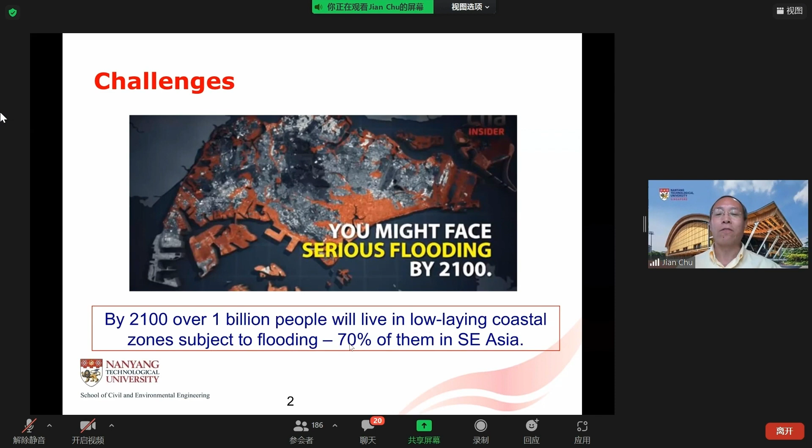Well, we know for climate change, we are facing a lot of challenges. Number one is the sea level rise, which will inundate some of our coastal areas. So for example, for Singapore, we were told that by 2100, 1/3 of our land will be inundated. And in fact, over 1 billion people will live in low-lying coastal zones subject to flooding. Unfortunately, 70% are in Southeast Asia.

In addition to inundation, we do have more frequent flooding. The picture showing on the left is the flooding in Singapore only last year. And the picture on the right is flooding in Qingdao. Qingdao has been regarded as never flooded, but started to flood recently. And the reason for that is because global warming has caused extreme weathers. Extreme flooding, extreme drought, they are just some of them.

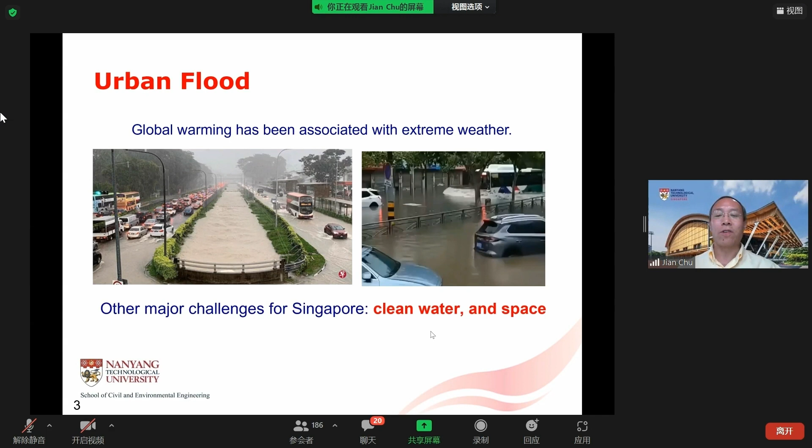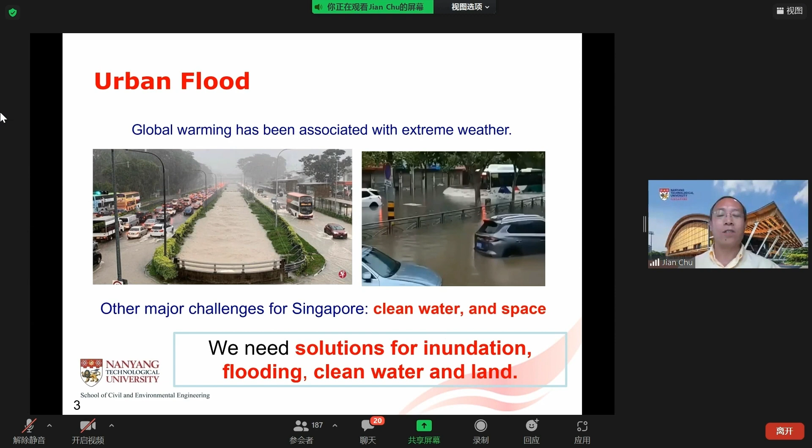For Singapore, in addition to flooding, in addition to inundation, we have other major challenges. For example, clean water: we don't have sufficient water, and we don't have sufficient space. So for us, we need solutions for inundation, flooding, clean water, and the land.

Then what are the solutions? Then after that, I'm going to explain why I have to promote coastal reservoir. Then for coastal reservoir, we have to construct a seawall. So I'm going to explain very briefly what are the options we can have for seawall construction. And then last but not least, don't forget, we still have to restore and conserve our marine ecosystem.

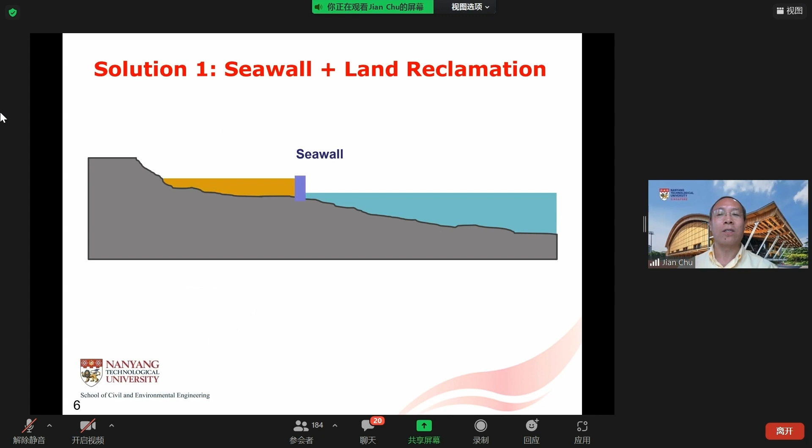Now let's start with the solutions for sea level rise. When sea level rises, part of the land will be inundated. One of the solutions would be you elevate your ground. So this will be a land reclamation. So this is a good solution. But on the other hand, you will need fill materials to do this. And particularly if you want to elevate your land to a higher level, you need more fill materials.

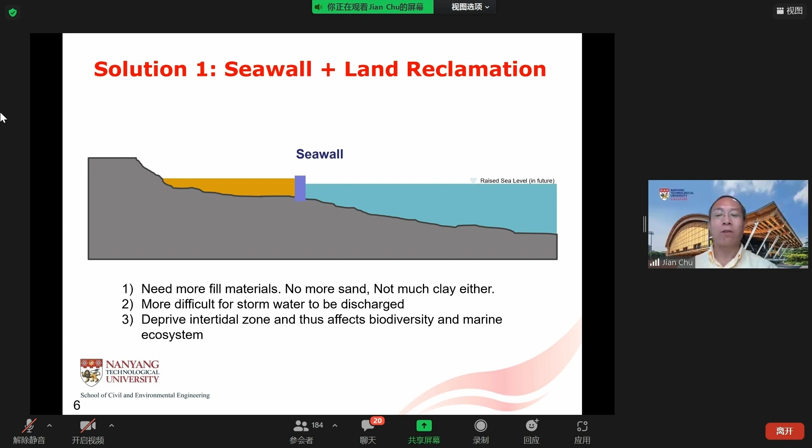But however, cities like Singapore, Hong Kong, and several other cities, it's actually difficult to get the fill materials for land reclamation. And once you elevate your land, it is also more difficult for stormwater to be discharged. Once you do land reclamation, you have deprived the intertidal zone, and thus affect the biodiversity and the marine ecosystem.

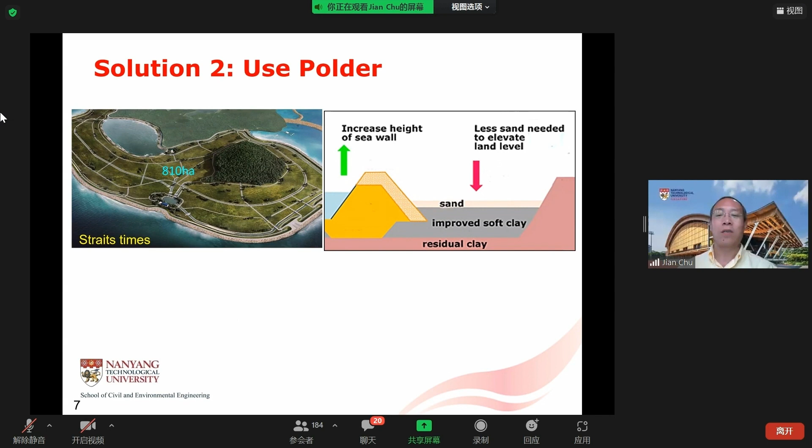And the second option is to use a polder. Polder, in my opinion, is no different from land reclamation, except you don't put the fill materials all the way to the required elevation. So you have a sort of depression, a low land. So that will save you some fill materials.

But on the other hand, you have even more difficulties for the stormwater to be discharged. And you have to install pumps. You also have problems with biodiversity and the marine ecosystem.

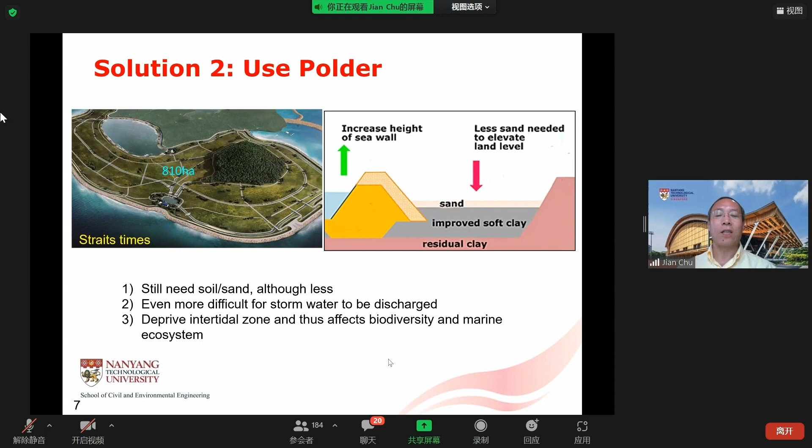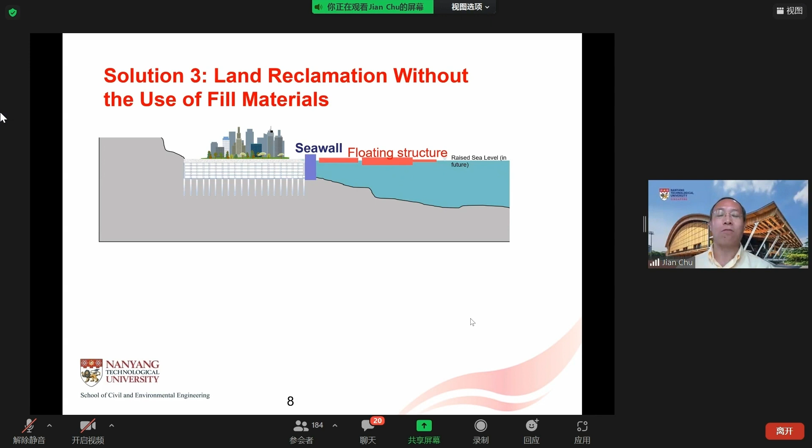Well, since we don't have fill materials for land reclamation, is it possible we just build a city from the seabed upwards once the seawall has been constructed? So in this way, you don't need a single grain of soil, and yet you can have space not only above the ground, but also below the ground. Can this be done? Oh, yeah. In addition to the strong seawall, you can also add in floating platforms in front, so that will create extra space.

I think we have several questions. Number one, is it more expensive? So I'm going to give you a cost comparison to indicate this is actually not the case. And the second question, is it technically challenging? The answer is yes. But however, if you talk to my friends in China, they will say no, because they have built the Three Gorges Dam, they have built many dams with a wall in the middle of nowhere.

But however, when you construct your Three Gorges Dam, you choose a location which has strong rock. So in other words, you have a solid foundation. But however, our seawall has to be on marine clay or mud. So in other words, it is still challenging.

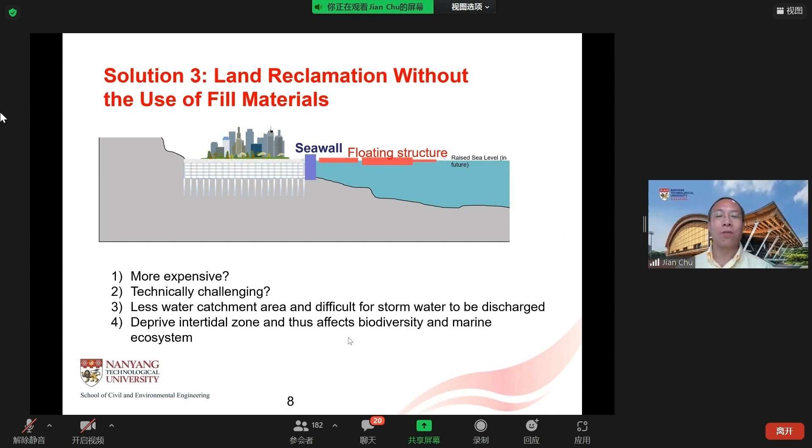Another problem is once you have covered the area with concrete, then there will be less water catchment, and thus it is difficult for stormwater to be discharged. And again, you have deprived the intertidal zone, and thus affect the biodiversity, etc. So we actually have done a cost comparison for a scheme of half a circle of artificial island. Because the cost of sand is expensive, if we use our scheme, it is actually more cost effective.

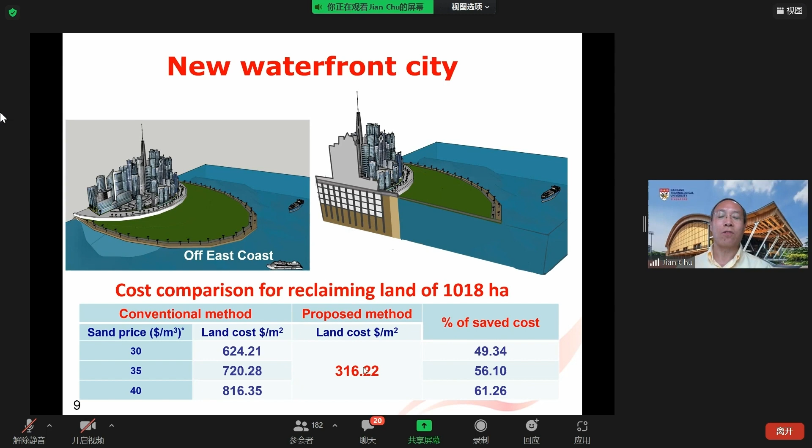Instead of building from the shoreline, you can actually use the same idea to build the artificial island, which is away from your shoreline.

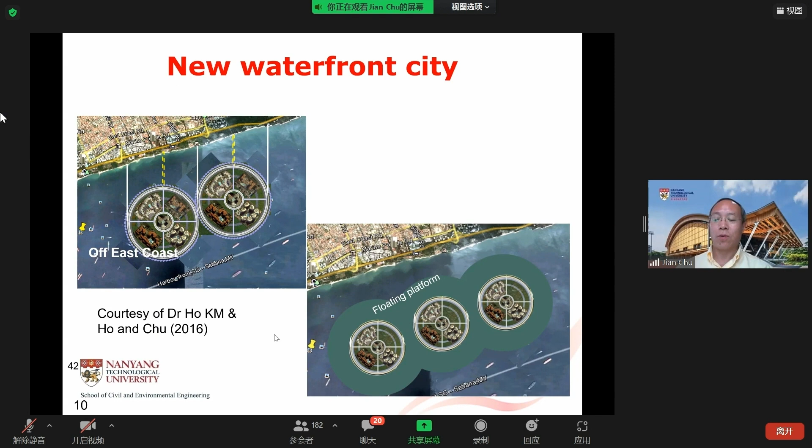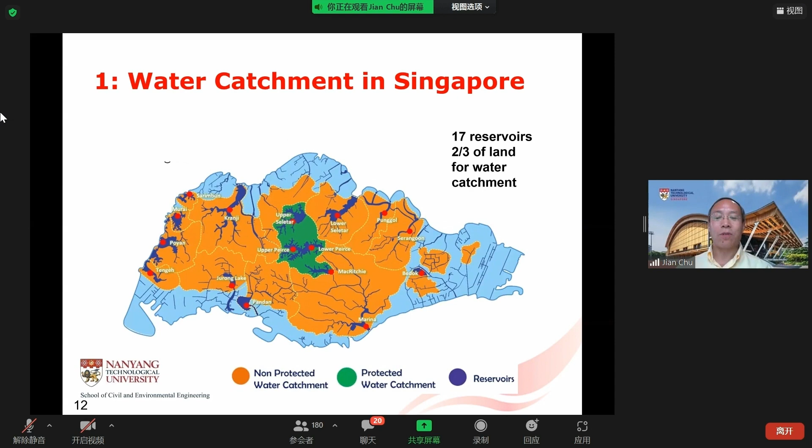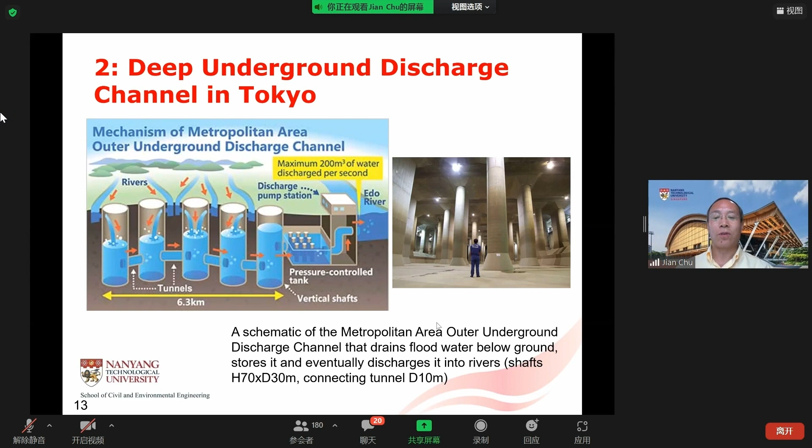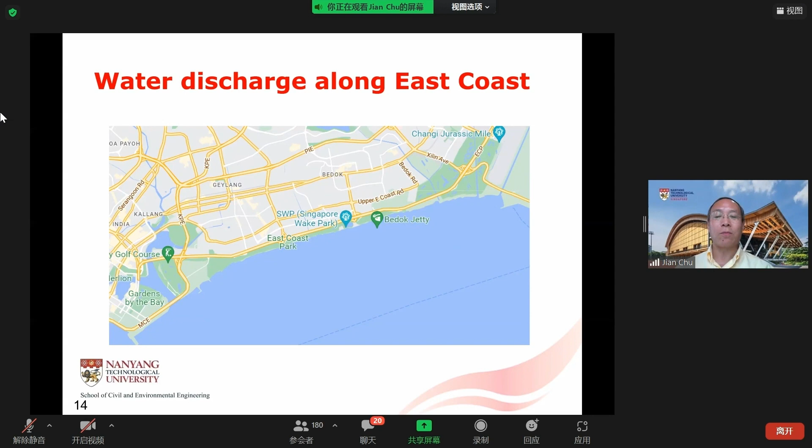In addition to water catchment, to water storage, you also need sufficient discharge channels for the water to be discharged into the sea. And if you look at our East Coast in Singapore, we do have several rivers, but whether they are sufficient to discharge the water, that would be something that needs to be re-examined.

And for that reason, the coastal reservoir idea has been proposed. You can actually create a coastal reservoir. The coastal reservoir itself can be used as a water catchment. So if your coastal reservoir is big enough, it will provide sufficient water catchment area.

But more importantly, if you have a coastal reservoir, when you have a heavy downpour and yet it is high tide, you will be able to withhold the water in the reservoir and wait several hours for the high tide to recede. So when it's low tide, you can discharge the water from your reservoir.

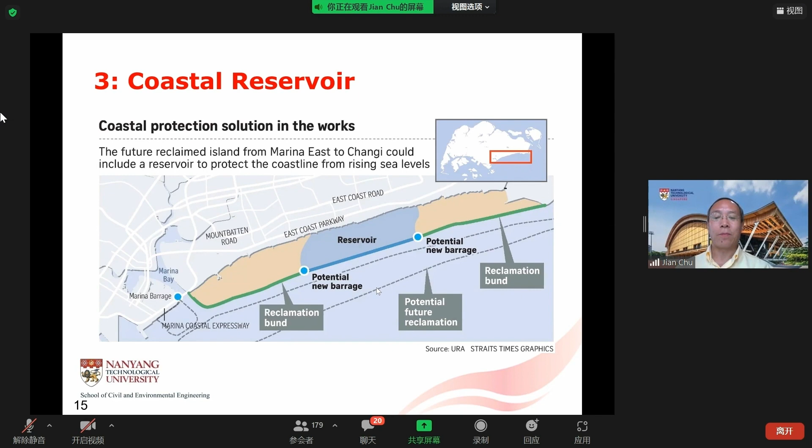And since you have a reservoir, gradually you can replace the salty water by fresh water. So gradually you can have a freshwater reservoir, and then you can have a sufficient fresh water supply for your city. So that's why we thought coastal reservoir would be a good idea. Coastal reservoir will serve multiple purposes, as I just explained.

In other words, we're actually looking for so-called integrated solutions. Not just for inundation, for sea level rise, for flooding, but also for fresh water as well as for space. So the integrated solution should cover, number one, coastal protection; number two, water catchment for mitigating flood; number three, the reservoir for fresh water; number four, land for commercial and residential development.

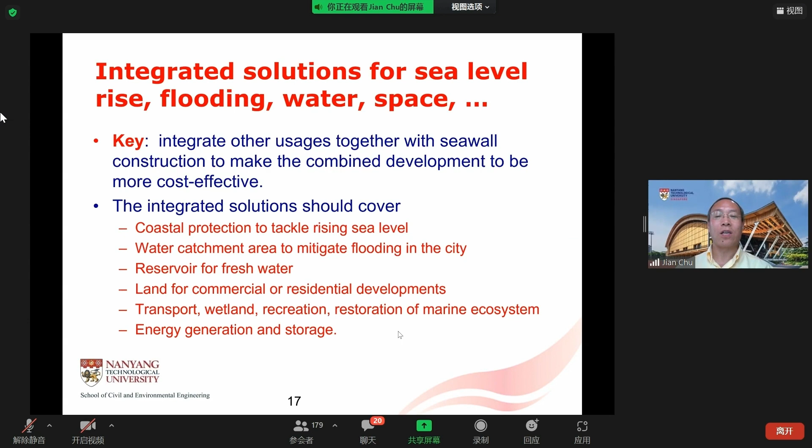It is even better if you can use your dam for transport, or use the area maybe for wetland recreation. And you can also add in the restoration of a marine ecosystem, etc. And you can actually use the reservoir to generate and store energy, but I'm not going to elaborate further.

Through the collaboration with Shimizu Japan, we have come up with this idea: a coastal reservoir constructed using a 10-kilometer-long seawall, and the seawall itself will also act as transportation facilities. Inside the seawall, you can have a highway. On top of the seawall, you can have MRT. And since you have a strong seawall, in front of it you can build floating platforms. Then you can build cities, residential and commercial buildings in front of it.

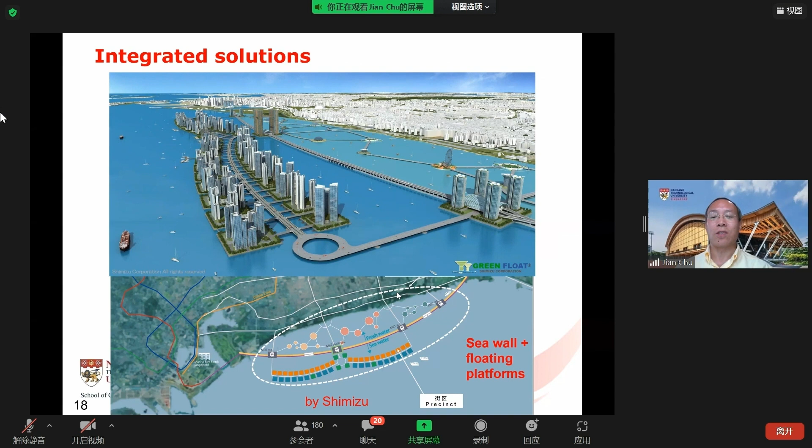And we actually have turned this idea into a video. Let me just share the video with you.

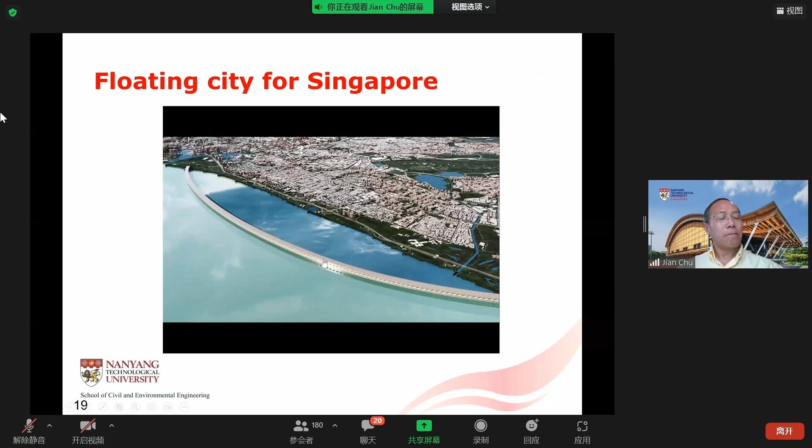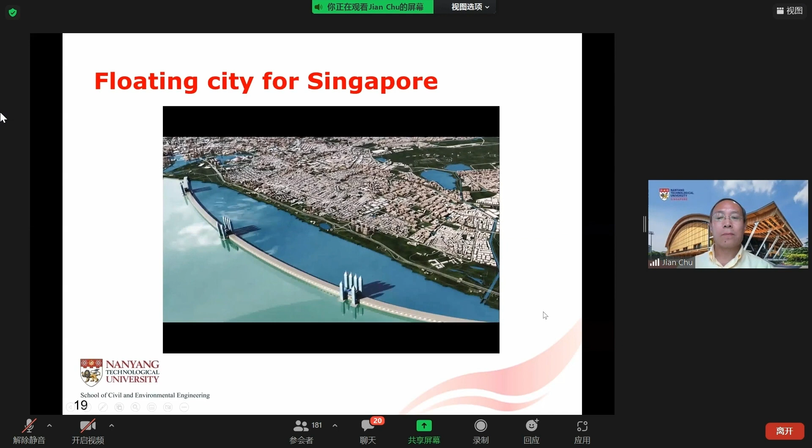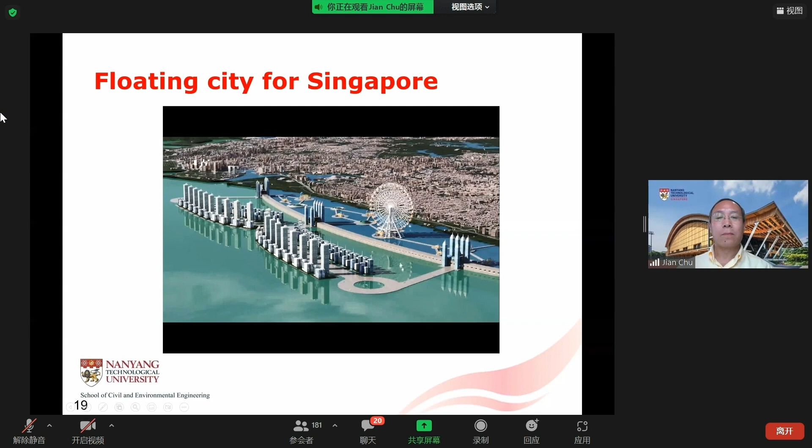Floating city has been designed for Singapore, a collaboration with Nanyang Technological University and Shimizu, Japan. A 10-kilometer seawall sits across the coast and forms a protective barrier and water catchment area. The seawall also acts as a transport system with an expressway and mass rapid transit system connecting East and West Singapore. Using the seawall as anchor, a high-rise waterfront city comprising commercial and residential buildings floats on a series of platforms connected to the main island.

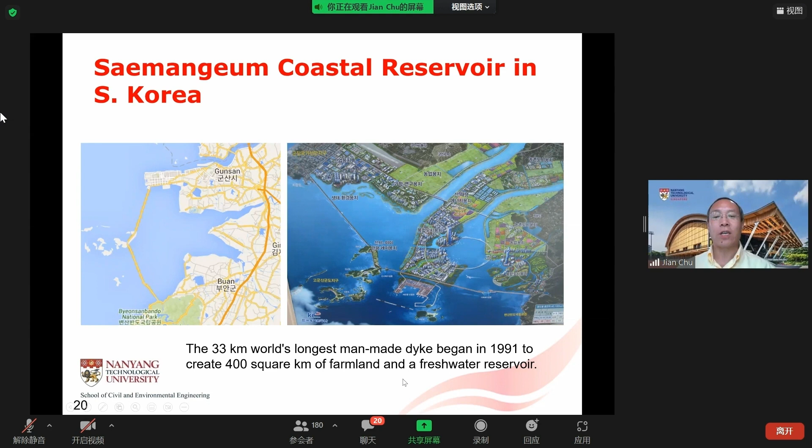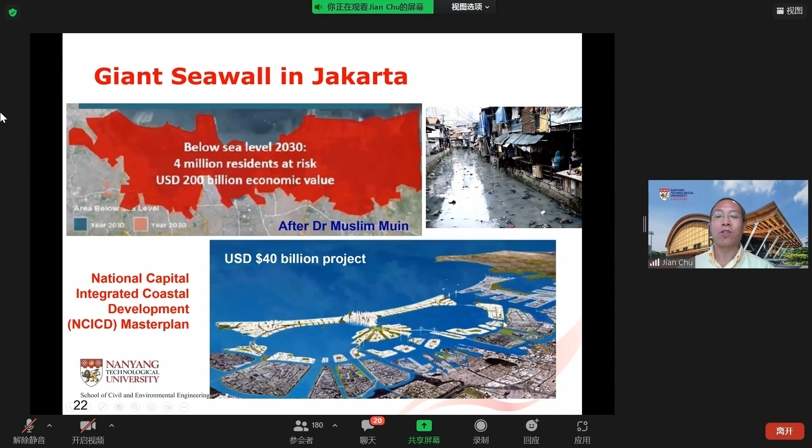But together with this, you have to dredge the 13 rivers inside Jakarta. Some of the materials taken out from the rivers can be used for land reclamation. So in this way, you will be able to create some additional land as shown in the picture.

So now let's go to the seawall construction. If you want to build a coastal reservoir, the key element is the seawall.

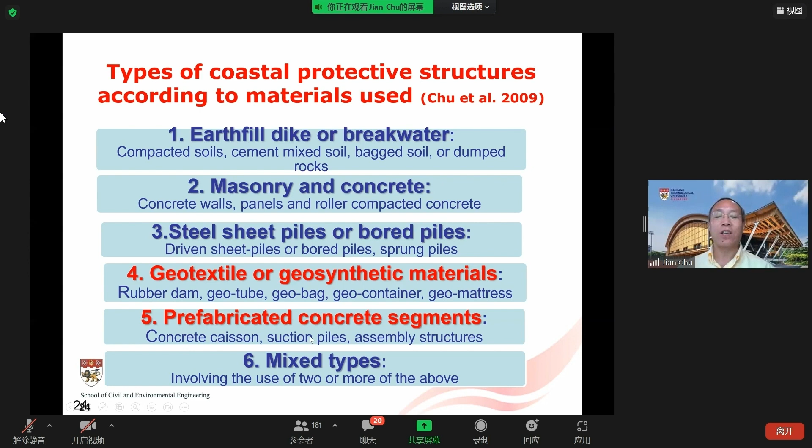In the state of the art report, we have summarized the type of coastal protective structures according to the materials used. You can use fill, you can use earth, you can use masonry or concrete, you can use steel sheet piles or bored piles, and you can use geotextile or geosynthetic materials, and you can also use prefabricated concrete segments. Now let me just give you a few examples.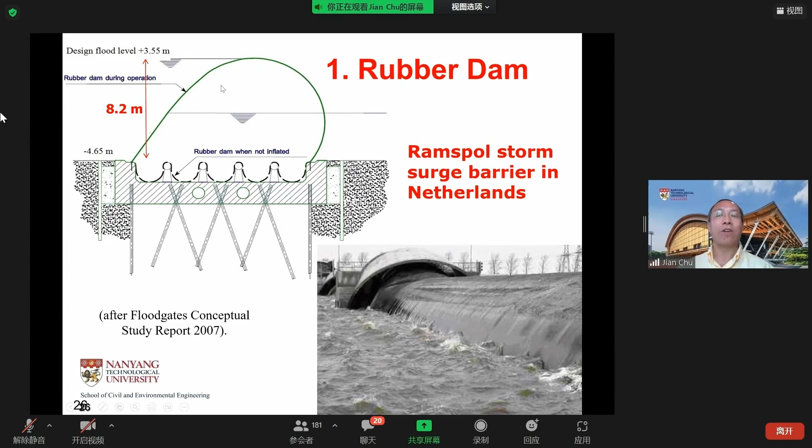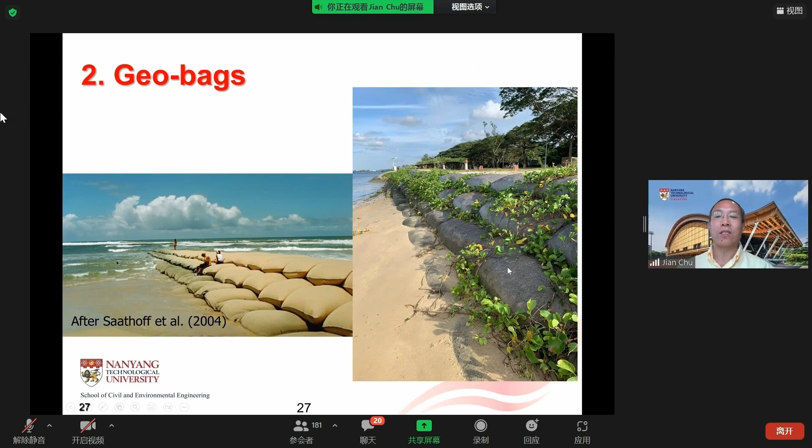For example, using geotextile, you can use a so-called rubber dam. The picture shown here is the storm surge barrier constructed in the Netherlands. It uses a big rubber dam, inflated by water and air, with a height of 8.2 meters, used for storm surge. If it's in shallow water, you can use the geobag; the picture on the right is actually from our east coast in Singapore.

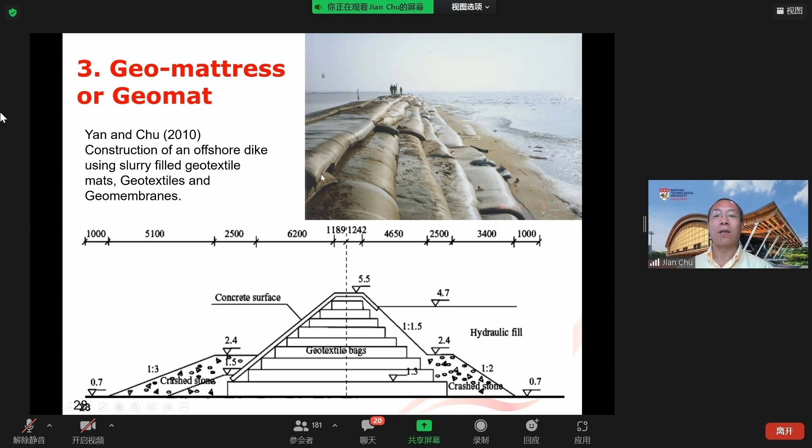Of course, you can use the geomattress. If you don't have sand, you can use clay to fill the geomattress layer by layer. Professor Yan from Tianjin University collaborated with me on one of the case studies, which was published in 2010.

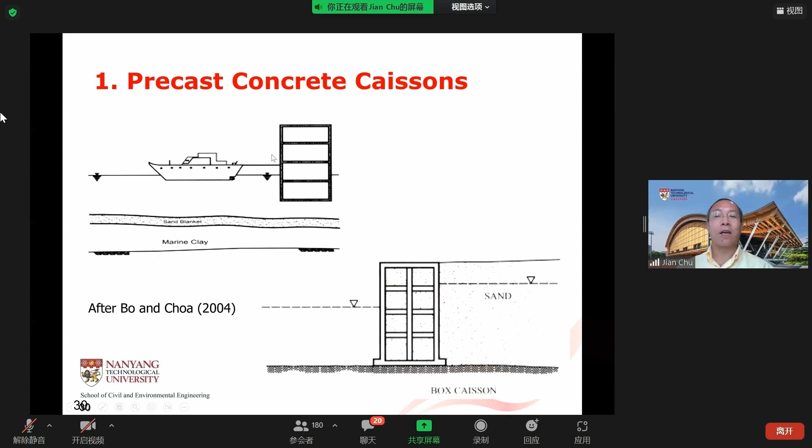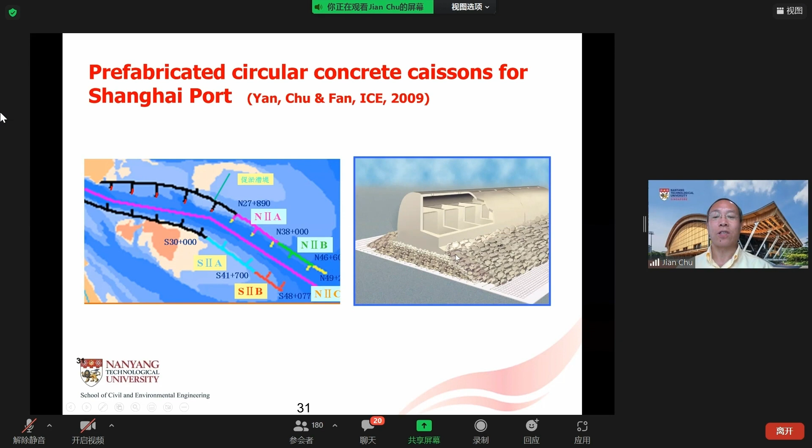You can also use precast concrete caissons. You cast your seawall, tow it to the place where you want to install it, and then you form a seawall. This method has also been used in China, for example, for the Shanghai port. This semicircular cross-section was used for that project. In Singapore, we also use the same method for port construction, for example the Pasir Panjang container port.

We cast a concrete box more than 27 meters tall, and then we put it on the seabed. However, because the seabed is soft mud, you have to prepare the foundation. On top of that, you have to put a rubble mound before you can put your concrete segments. In other words, you have to spend a lot of effort and a lot of money on the foundation.

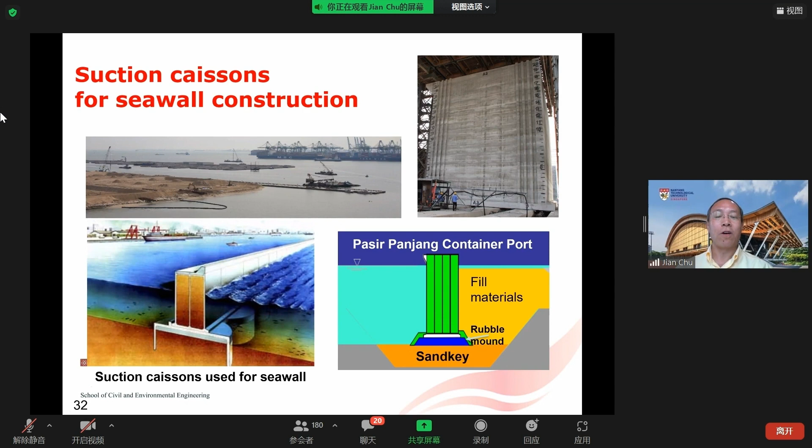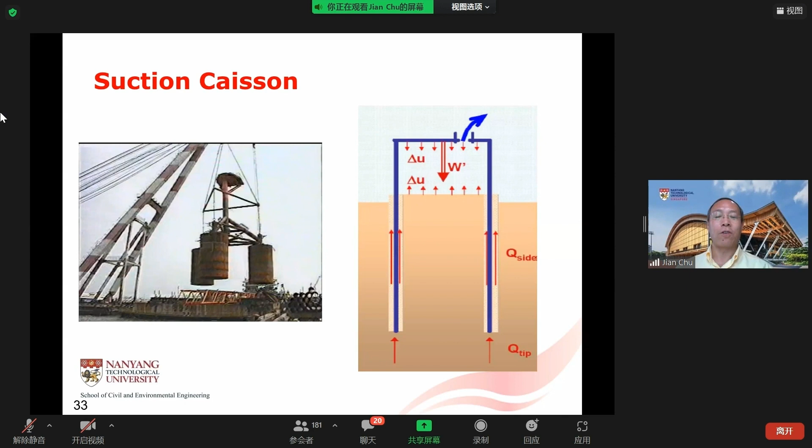An alternative would be to use a so-called suction caisson, an inverted cup, in other words a concrete cylinder, and use suction to suck your cylinders into the mud to form part of the foundation. In this way, you don't have to do soil improvement. Suction caissons are not a new idea, because for offshore platforms and offshore wind farms people have been using them extensively. However, for coastal applications, the installation is more challenging, simply because the water depth is shallow and the available suction is small.

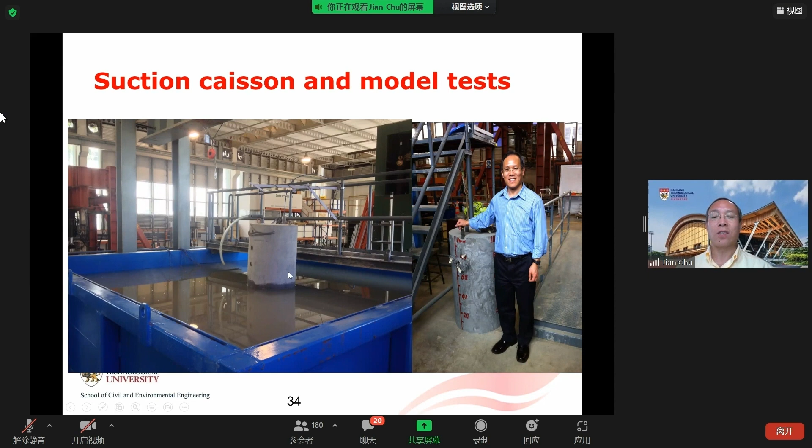For that reason, we have done a lot of studies using a 6x6 consolidation model tank with a caisson of 1 meter in diameter, as shown in the picture. I don't have time to discuss our research on suction caissons here. I'm only going to share with you a design illustration rather than a case history, because the facility has not been constructed yet.

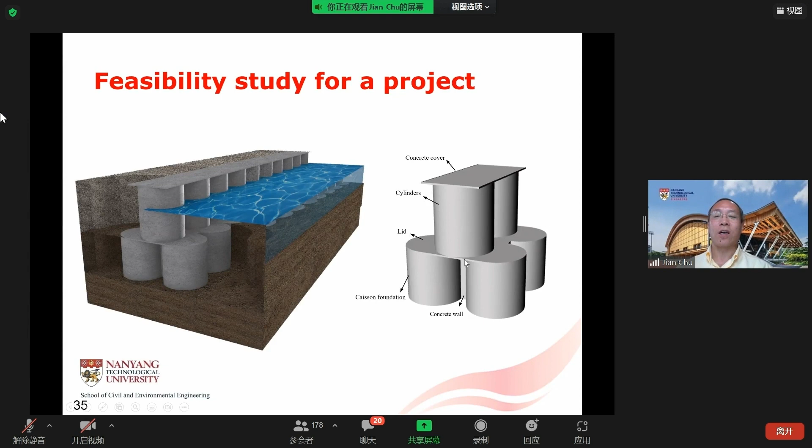This is going to be land reclamation. This seawall is going to be used as the containment bund for the land reclamation. The water depth is up to 25 meters, so you will need a very tall wall to sustain the fill materials behind it. This is the foundation design. We use 4 cylinders as the suction caisson, and then use 1 row of cylinders to form the seawall. This is the construction sequence as illustrated in this video.

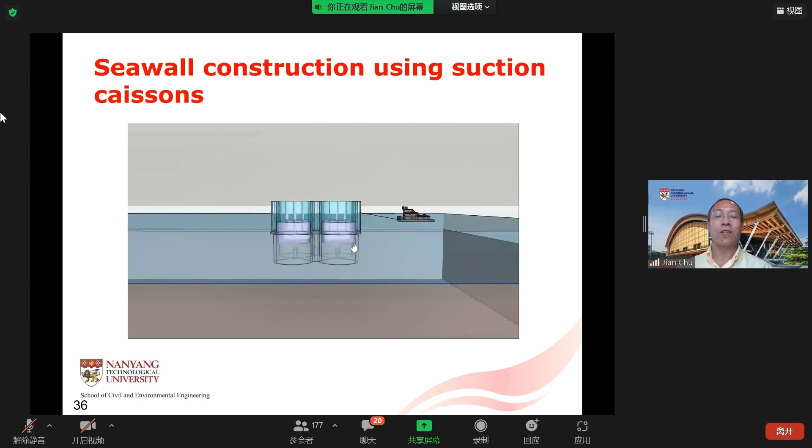You cast the suction caisson, you cast the top cylinders, which will be part of the seawall, you assemble them in the casting yard, and you tow the whole structure to where you want to install the seawall. Once it's at the desired location, you use suction to suck the 4 cylinders down. The reason we use 4 cylinders is to balance out and eliminate any eccentricity.

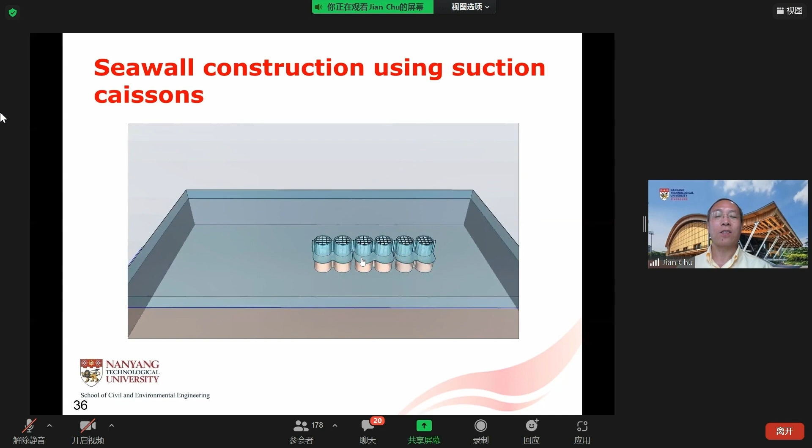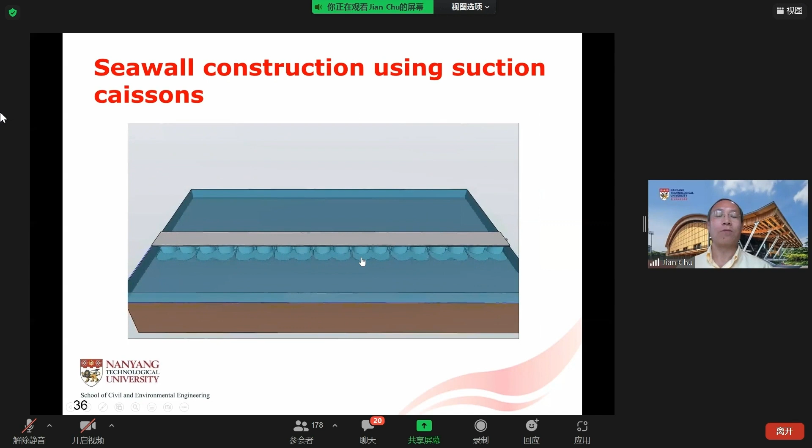Then you repeat the process and form the seawall. Once you have the seawall, you can put fill materials behind it for your land reclamation. Of course, on top of the seawall, you can build a road. We have also done a lot of studies on how to design such a system and how to place fill materials, in this case mud, for land reclamation. This is just a sketch of our design as well as the land reclamation scheme.

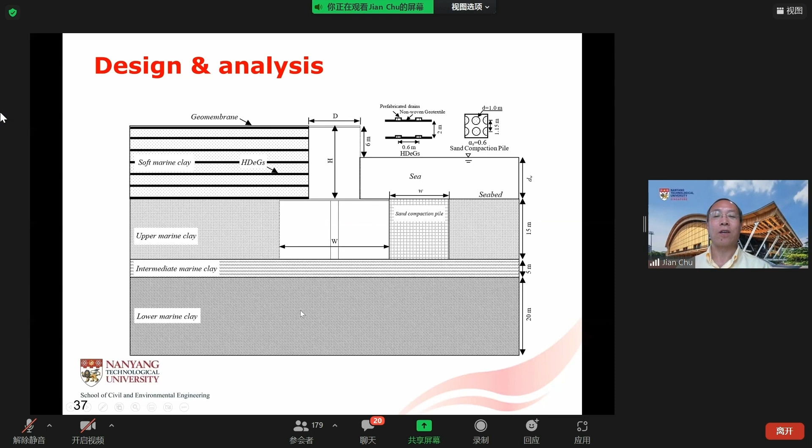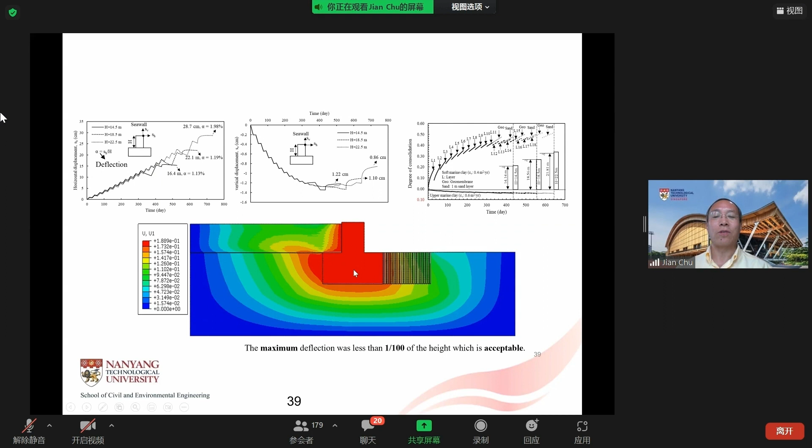We have developed analytical methods and also finite element analysis to design and ensure the wall will be stable and the deformation will be within the tolerable limit.

Well, this is just a quick introduction on the seawall. I know I don't have much time, so I'm going to move to the last topic, which is conservation of marine ecosystem. Whatever you do in the sea, you are going to disturb our marine ecosystem. Particularly if you construct a vertical seawall, you are going to destroy the intertidal zone.

If you talk to a marine biologist, he or she will tell you our intertidal zone is so important because that is a place for biodiversity and a place for marine ecosystem. That's also the area where the marine vegetations can actually sink a larger amount of CO2.

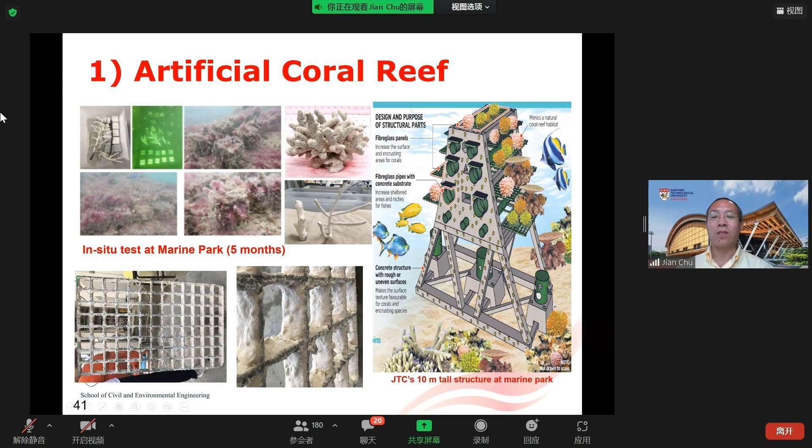The coral likes pure calcium carbonate. So if you put them into the seawater, it will facilitate the cultivation of the coral. We have our panels installed in the so-called underwater condominiums in Singapore. The picture shows the positions of our panels, and this picture was taken not long after it had been installed.

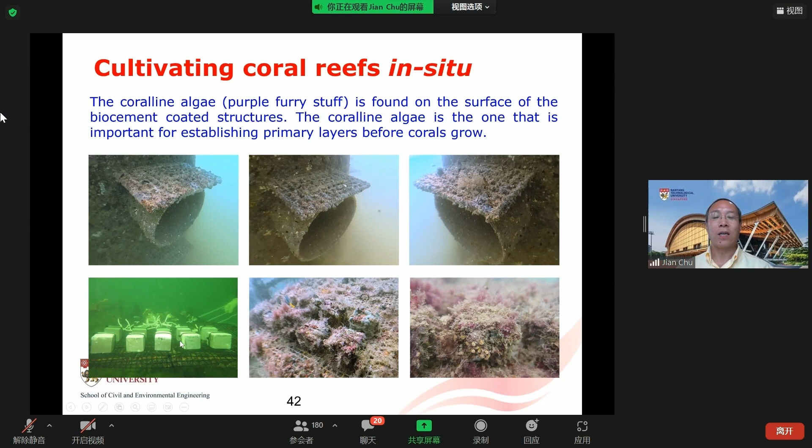But now I'm sure some corals have been growing on top. We also do independent experiments in seawater, and below, showing some of the signs of formation of coral.

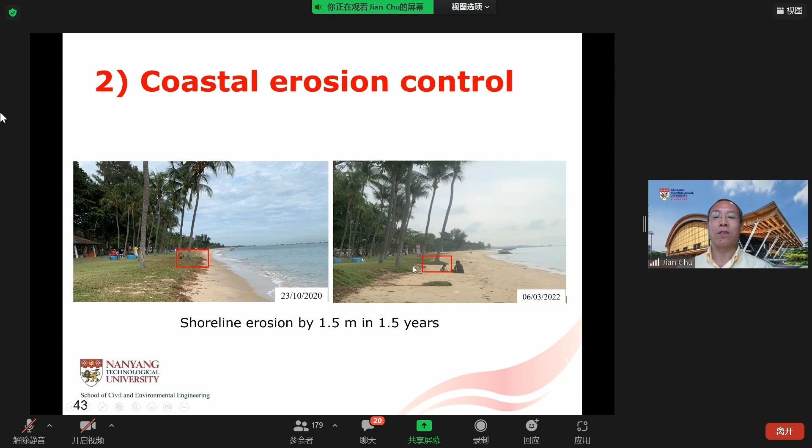The second question is on coastal erosion control. Just to show you an example, you can see the comparison of the two pictures, which were taken with an interval of 1.5 years. You can see the amount of erosion within the 1.5 years is almost 1.5 meters. Then how to prevent further beach erosion, or better still, restore some of the eroded land?

Our idea is to use biocement. All you have to do is backfill a little bit of sand to recover the original elevation. Then on top of that, you can start to spray biocement solution. After a while, you can see that the ground has been restored, and also the grass can actually grow on top.

One of the best features of this method is the sand will maintain its original color. So you actually cannot tell this area has been treated, because the color is exactly the same as the original beach. After this successful trial, we are using this beach erosion control at a larger scale at another location. The picture shows part of the field operation.

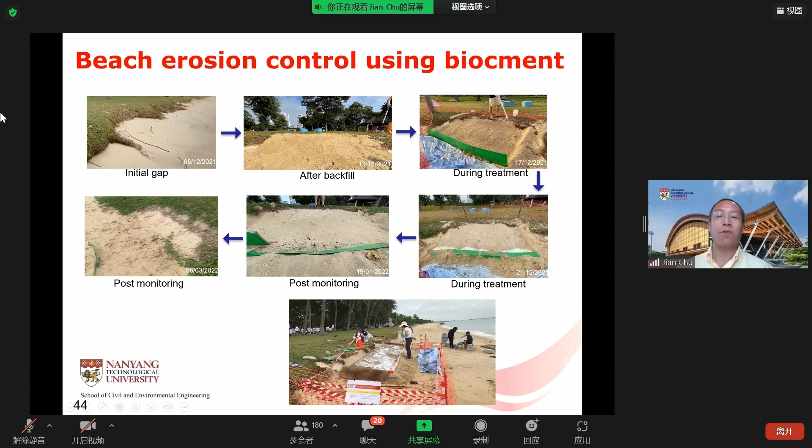Now go to 4 minutes. 4 minutes. Okay, yeah, I should be able to finish.

Now let's move on to the third topic, which is construction of artificial intertidal zone. Just now I mentioned the intertidal zone is very important, and yet with a vertical seawall, we will not have an intertidal zone anymore. However, we are all engineers, so we can engineer an intertidal zone, which can be done as part of the extension of the seawall.

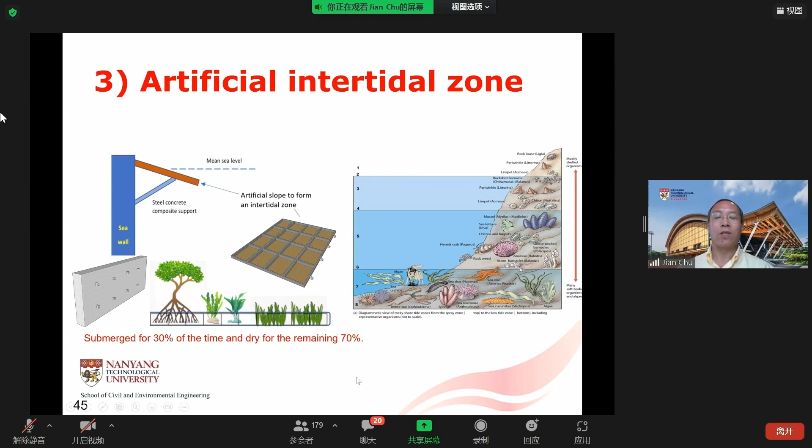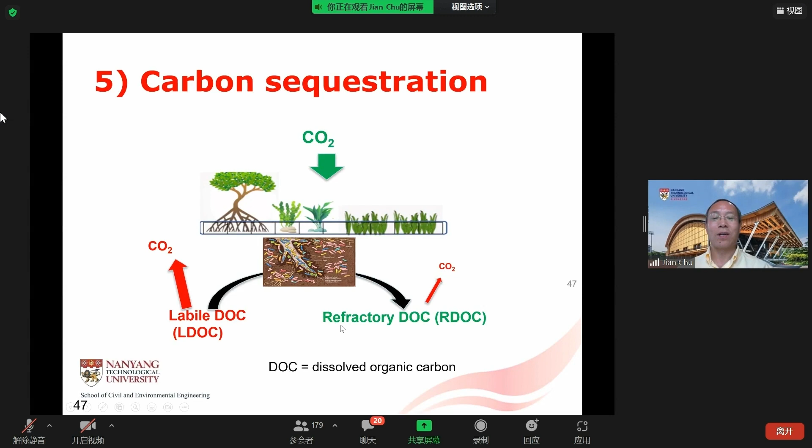When you construct a seawall, if you have a provision for an artificial slope, you will be able to install an artificial slope with mangroves and seagrass, and that will restore your intertidal zone. Or you can also have a floating wetland, using a modularized system as shown in this picture. Once you have seagrass and mangroves, you can start to have carbon sink through a so-called LDOC or RDOC process.

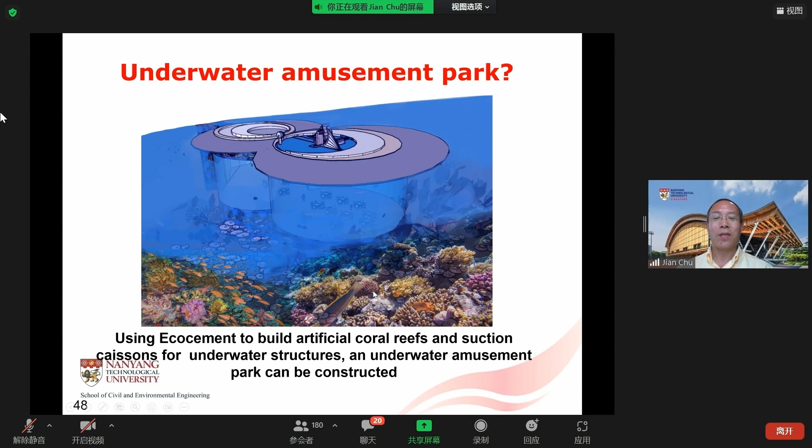What if you combine all the technologies together? Not only can you restore the coral reef and the marine ecosystem, you can actually construct an underwater amusement park as shown over here. You can have an underwater restaurant, and within it you can see all the fish, all the sea creatures, all the beautiful coral. This is just like an underwater aquarium.

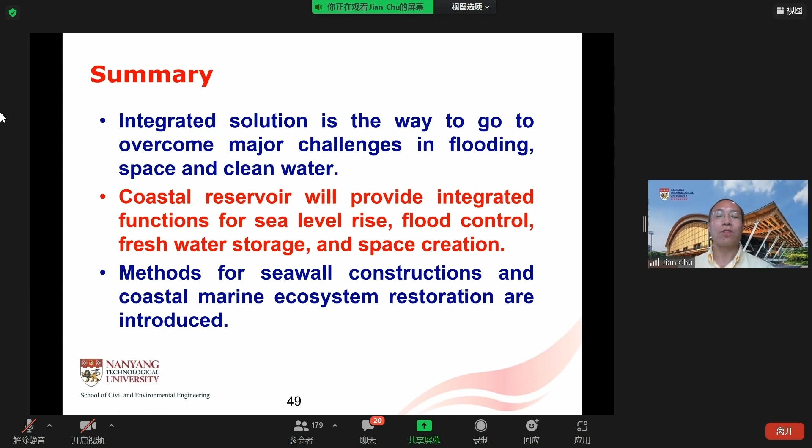In summary, an integrated solution is the way to go to overcome major challenges in flooding, inundation, space, and clean water. Coastal reservoirs will provide integrated functions for sea level rise, flood control, freshwater storage, and space creation. Methods for seawall construction and coastal marine ecosystem restoration are introduced.